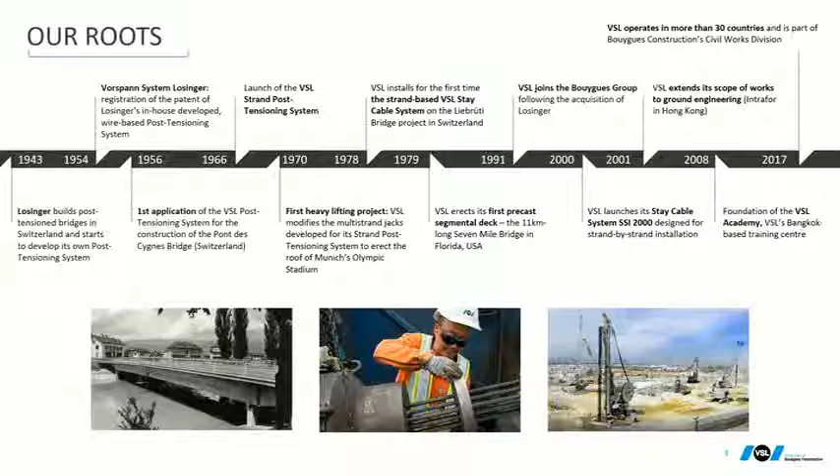A bit of history: VSL was built as a spin-off from Losinger, a Swiss company known worldwide at that time for construction. VSL, meaning Vorspann System Losinger, was created around a patent for how to anchor wires to an anchor head and transfer this force to a piece of concrete. We call this post-tensioning, eventually.

VSL developed the wedge for the 7-wire strand. From this concept, we developed post-tensioning, stay cable, heavy lifting, and other applications making use of strand and anchor heads.

Here's where we can find VSL on Earth. Basically, VSL works on various technologies: bridge construction, foundation, ground engineering, containment structure, repair. In terms of technology, we're talking about post-tensioning as our classical core business, bearings, stay cable - of course the topic of tonight - heavy lifting, and geotechnical.

Bridge construction is something we have been active in here in this region. For foundation, I'll go quickly through all this - please talk to me if you need more detail on any of these aspects.

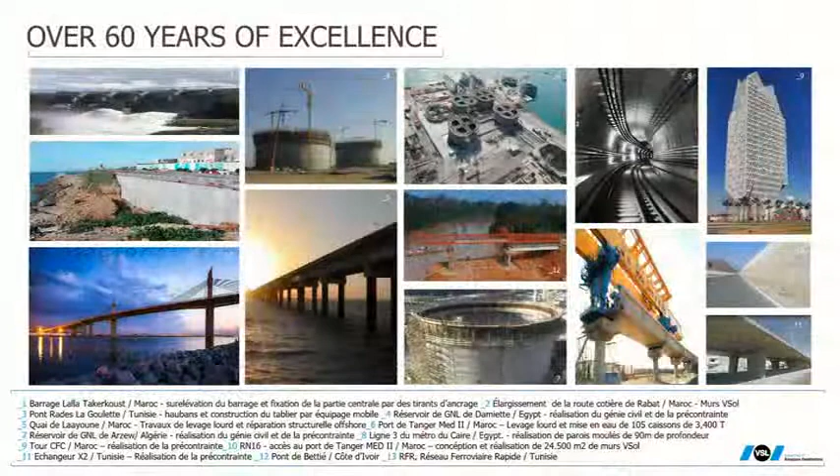So let's now enter the heart of the topic: stay cable. Just a bit more history - the first stay cable bridge was in 1979, and since then we have kept developing, eventually arriving at various solutions up till now.

So here we are. In terms of stay cable, we're going to look at it from the point of view of components to begin with. Everyone knows what a stay cable is - it's a cable structure transferring force from one point to the other. Today, in the perspective of a new recommendation and a new code, it's seen as a family of 5 components.

The first is the tensile element, the strand, which transfers the load from one point to the other. Second is the anchoring, the anchorage, transferring the force from the strand to the structure. Yes, please.

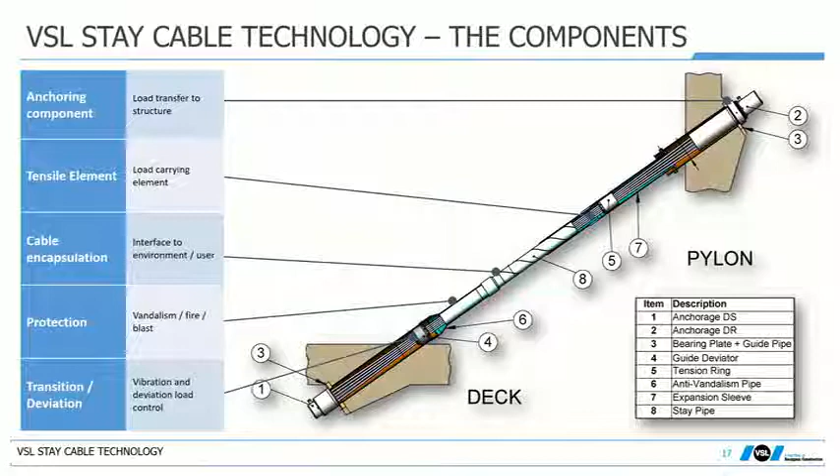So now in terms of application, today, and especially in the perspective of the FIB code, systems have to be modular, meaning that you can have a technology of strand, the technology of anchorage, and apply it to various different applications. And this offers some design opportunities.

Basically, we have a cable with 4 different families of applications. We have stay cable bridges, long span structures, long cables. We have what we call extradosed bridges, where the quantity of live load compared to permanent load is much smaller, permitting some optimization in the behavior of the structure. Then we have hangers, roof cables, vertical. Then, at the other extremity of the application range, we have what we call bowstring cables or tie-downs.

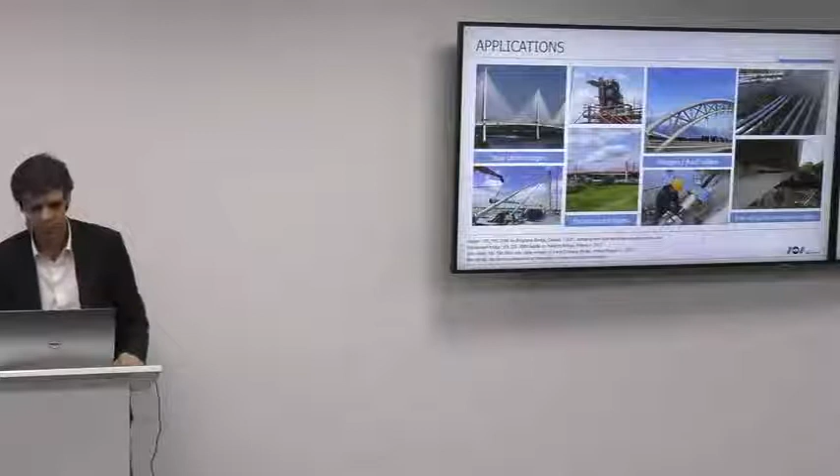And all these different cable applications we can give a bit of classification. I'll just change the slide. This classification is made from the point of view of the loading, whether this loading is a high fatigue loading, or where there is more deviation, or combined. And from this loading, what type of permanent force we accept to have on this cable, or let's say it differently, what part of the capacity of the cable we accept to have as permanent force, and what other part is left to cater for safety.

So if we go with stay cable, we have high fatigue loading, high deviation potential occurring, and therefore we do not occupy more than 50% of the capacity for the permanent load, basically. If we go with extradosed cable, we have moderate fatigue loading, low deviation, and therefore we can go beyond in terms of permanent force.

Hangers, these depend on the application. We can have hangers experiencing no fatigue loading, and others with high fatigue loading, and therefore this is a decision of design: what is the maximum force you can have in permanent situation?

Bowstring cables usually have very low fatigue, almost no fatigue, no deviation. Tie-downs have low fatigue, but can have extremely high deviation.

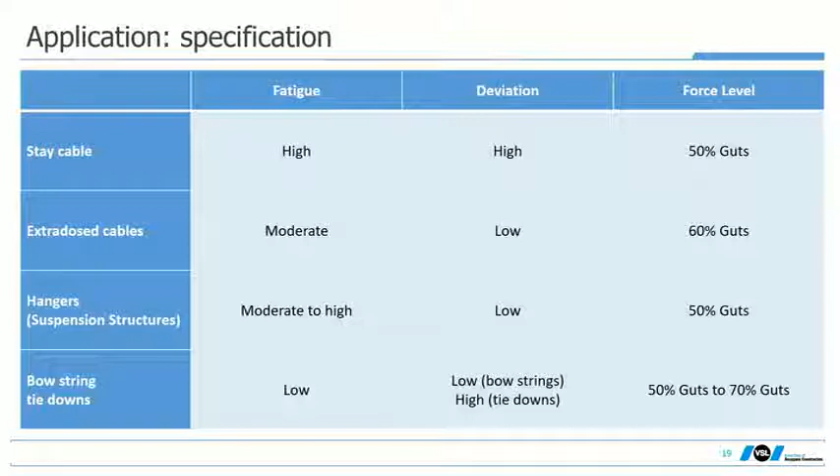Is this the initial load you put on the cable when you construct, or is it the final capacity? You can only stress to 50% when you put it. This value usually is what we call the maximum service state, meaning that if you anticipate a high service load for your permanent situation, you would stress it initially at 30%, for example.

Finishing with tie-downs. Tie-downs are cables used to restrain a deck of a bridge against the abutment. Most bridges elongate with temperature variation, and therefore this cable can experience very big rotations. So as a designer you have to judge what would be the maximum force in this cable in service, given the potential deviation you may have on the tie-downs.

So, from this classification, VSL, as a stay cable supplier company, is offering a portfolio of solutions. And what is important with these various types of solutions for each application is that they can be combined together.

Typically, for the tensile element, we have various technologies of strand. These have to address the situation of the structure, basically the exposure to environment, how harsh it is or not, the type of loading you expect, and very important, the normative frame in the area, the design codes.

Typically, in the USA, it is not allowed to have galvanization on the strand on federal projects, and therefore you have codes developed for the use of this type of strand without zinc. For the rest of the world, you can use zinc, so it makes the technology a bit different.

Why in the US do we have no zinc? Why are Americans not allowing galvanization? I think galvanization is a technology which is extremely polluting. One reason, not the only one, is that the galvanization process is highly polluting. But it's not only this reason. Today, what I know for sure is that they are developing a code, a design, or a normative to have zinc in the US as well.

But for the moment... does heat change the performance of the material? This is true, but it doesn't mean it doesn't work. When you have a material and you apply a zinc process, you change the characteristics. This is true, and therefore we have different requirements for strand with and without zinc. Especially if you have silicon in your steel, you have a bigger impact on the zinc. Yeah, you are going to have brittleness. Exactly.

Talking about the transfer component for transferring the load from the strand to the structure, we can apply various different solutions: solutions with anchor heads, solutions with clevises, and solutions without any anchor, just by deviation. We introduce the load to the structure through a deviation of the cable. We call it a saddle.

The encapsulation of the cable, the stay pipe, has to accommodate the environment, which can be of various forms. It's there to provide the cable a satisfactory behavior in terms of wind impact. The wind impact is of two natures: the drag first, which is the force the wind introduces onto the structure, making it tilt - this is one aspect. The other aspect is dynamic, how the wind is exciting the cable.

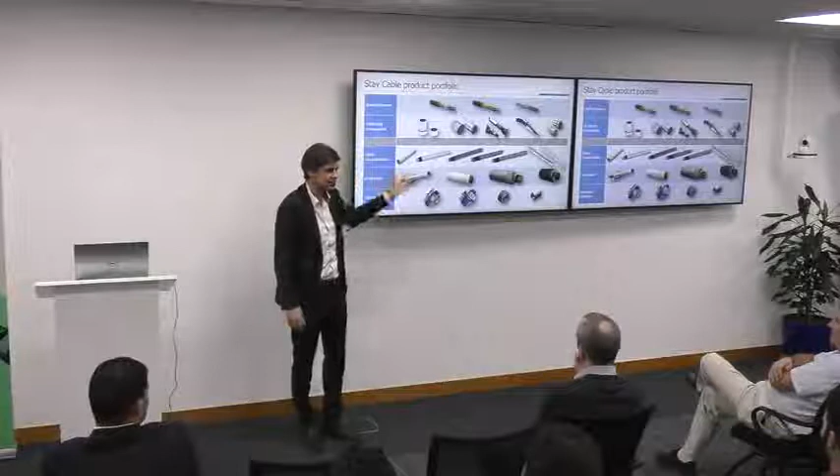Then we have protection, various types of protection - basic protection, fire protection, blast protection - all of these being required or not depending on the structure. And eventually we finish with the deviation device, which can be dampers, which can be guiding devices, or can be just nothing, just a compacting element to maintain this compact shape of a cable.

So we go one by one through all this family. Let's start with the main tensile element and coming back to your questions. Today the standard is this strand, which grade is 1860 MPa. This is a new standard which has evolved from the former 1770.

Today, the strand industry has developed a higher grade, 2160. So the wire industry is increasing the capacity of strand. And today, of course, VSL is proud to have been fully qualified for this application.

Is there any reduction in the extension at failure? You mean strength? I said extension, you mean elastic extension? Yeah, because you have got a certain extension upon which you should not allow any further for the ultimate. So the Young's modulus is the same. Relaxation? No, extension, not relaxation. So if you apply a higher grade of strand, you can reach a higher extension.

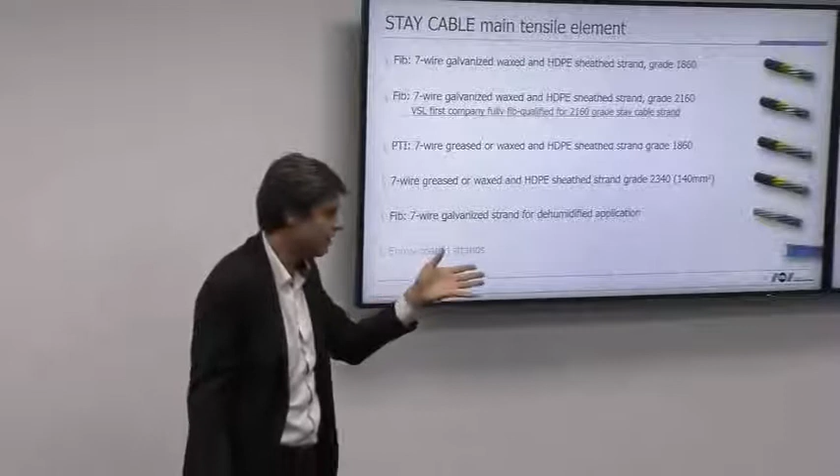But if the next question is, can we optimize the structure by using this strand, the response is technically yes. Economically, not sure. The cost per Newton of force is higher with this technology of strand compared to the classical one. So unless you have a clear technical reason to go more compact, using this high-grade strand might not be optimum.

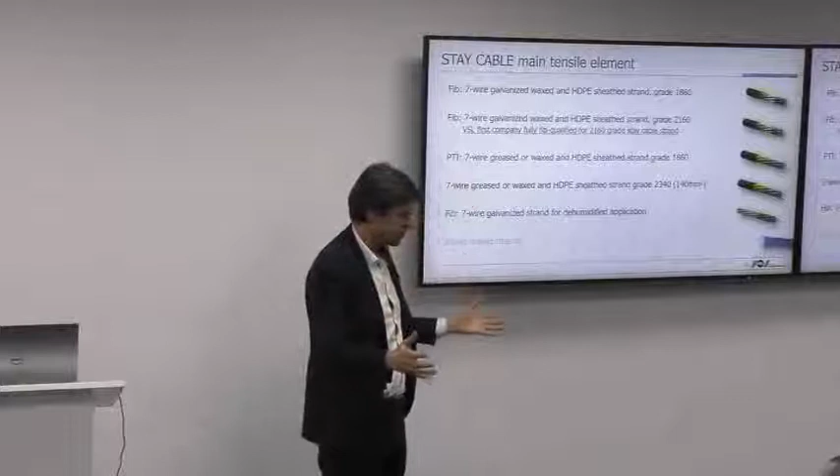How much more expensive? Like 20%, 100%? No, it's not this. We're talking about a few percent. But this depends if you analyze the global cost in a structure, and introduce all other parameters. If for the same quantity of strand you have higher force, you can reduce the number of strands and save on labor costs and in many other places. But trying to save only on the pure kilogram of material is a waste of time.

So this is a strand we call PTI strand, which is the strand as recommended in the US. It has no zinc, and therefore has slightly better behavior for some aspects and slightly lower for others. Talking about fretting, for example, it's a bit less; talking about ductility, it's a bit better, due to the no zinc on the strand.

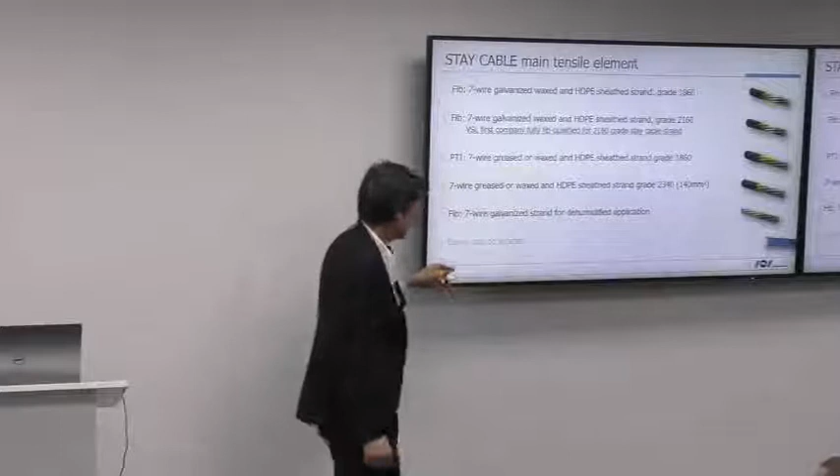VSL is making use, for a specific concept I'll show later, of strand without any sheathing and injection. And eventually, we're talking about epoxy-coated strand. VSL has reference experience with this type of strand, but VSL does not recommend its use.

Do you have epoxy-coated strands for stays as well? We have experience, but we will never recommend this technology of strand. Why do we not recommend this? Does it crack? It cracks, yes, well, it's correct. It's very famous for internal strands, but then you have a lot of wedge loss, etc. You have a huge setting of wedge, and a huge increase in relaxation.

Today we are relying on this strand because it has very low relaxation. Now we introduce a technology which multiplies the relaxation by more than 2. On top of this, in testing, this strand has low redundancy, meaning you do not lose one wire, you lose a complete section. It's a localized corrosion. Exactly.

So you don't recommend it just for stay cables or for post-tension? VSL's position is to do the best for the structure. Today we have not seen any advantage of using epoxy-coated strand in any application. Maybe we have overlooked something, maybe we have missed a point somewhere, but for the moment we do not see a technical interest in going with that strand.

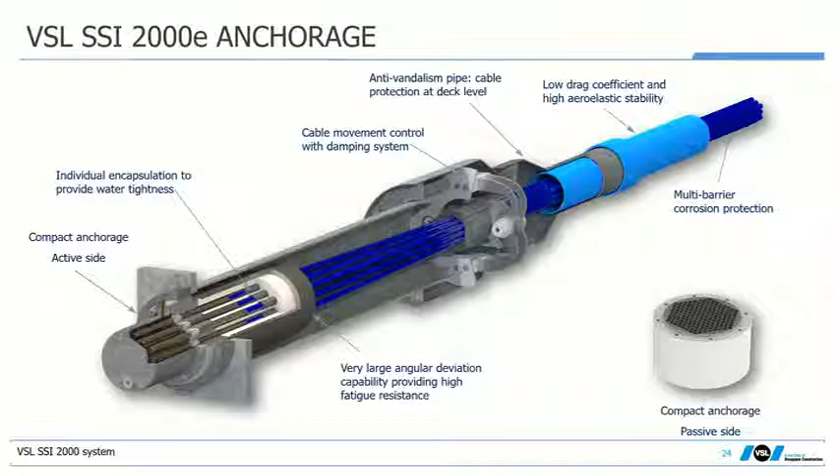Where VSL has been developing lately is introducing all these components here in what we call the transition zone of the anchorage. For the passive anchorage, they are integrated into the anchor head. The anchor head is this piece of steel where you have the wedge transferring the force of each strand to the anchor head.

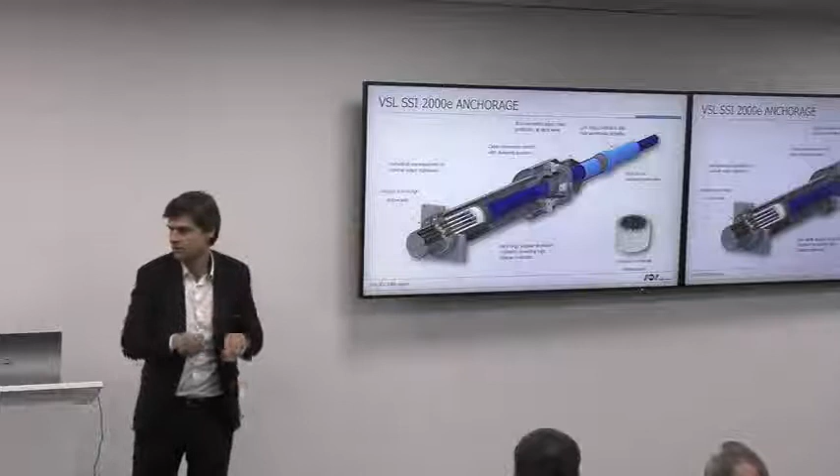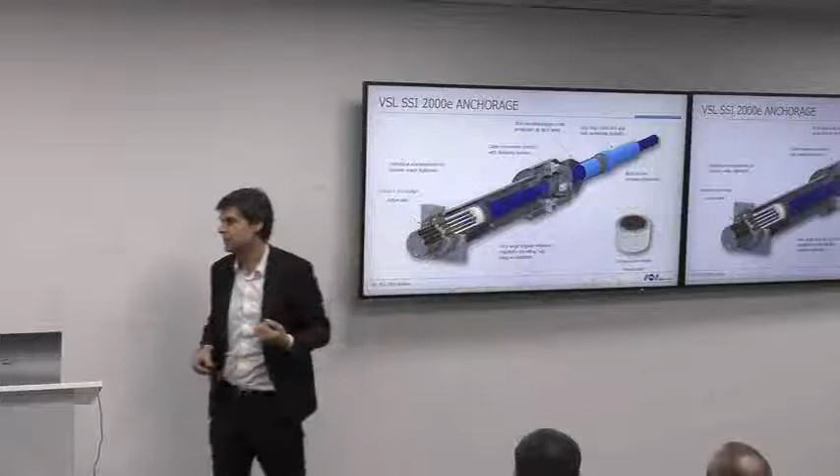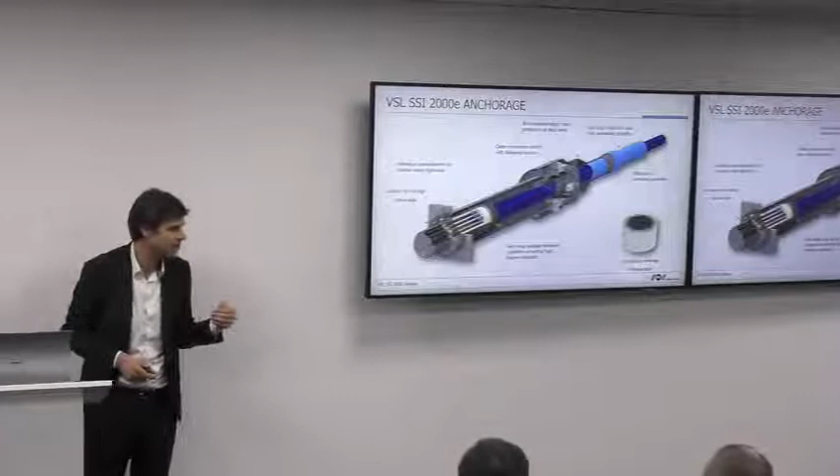So we have all these parts here, which are in this transition zone, introduced and consolidated inside this anchor block. This is kept on the active side for one reason: from this side you have to stress or tune the force of the cable. So there you don't know where the sheathing of the strand stops, and the sheathing has to stop inside the anchor block. So we have an extension required to make sure we absorb this position of the sheathing stopping inside the anchor head, and to make sure the system remains tight during service and during installation.

You have any question on this?

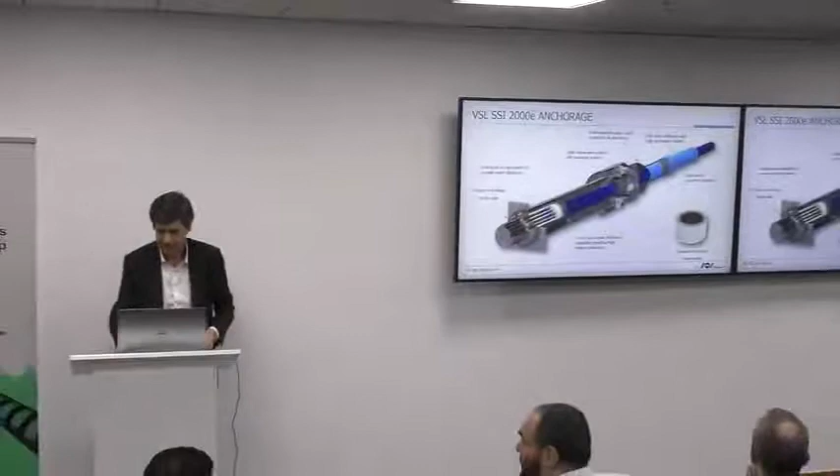So this anchoring system can be implemented into a structure, and there are a lot of different possibilities to do so. At the bottom, for example, it can go inside a box girder, below a box girder, above the deck through a steel structure. It can be attached to a tower through steel structures, or through the tower, or inside the tower. Everything is modular, and it's about design possibilities, how to connect it.

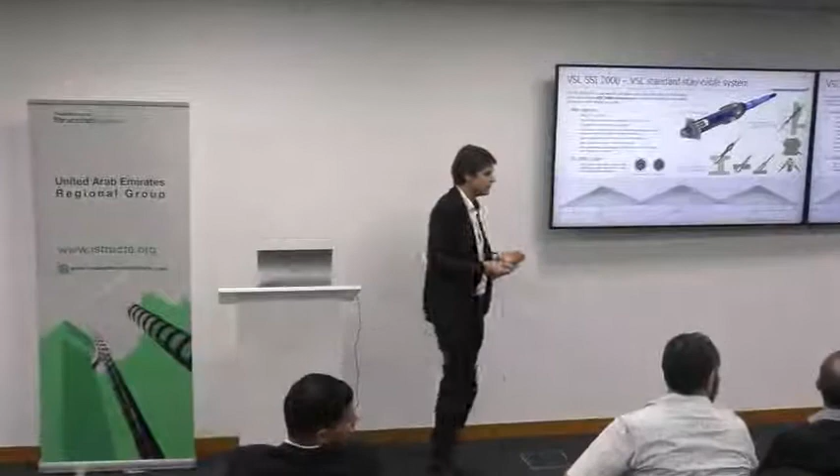What's the minimum space required if it is inside the box girder for your jack? Here, for example, the first trick, here or here, absolutely for the jack. Is it VSL's proprietary jack for the system? Correct. So what is the minimum space? We can tell you it's 1 meter behind the head, for example, but then we can negotiate a bit on this one. For this one we can work with much smaller space on the passive side. On the active side we can as well reduce the space. It's a detailing exercise - we just have to make sure we can do the operation we're supposed to do, and from there we define the minimum requirement space.

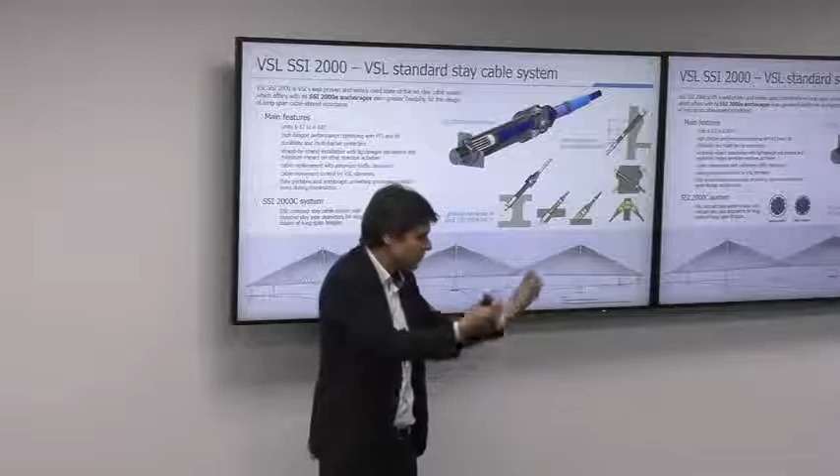It's a good question - are you using single strand jacks? Absolutely, yes. Sequences become really a headache, yes? Not necessarily. How many cables, strands have you got in one cable? We go from 12, or 7 or 3, to 180-something. It's a repetitive exercise, it requires a bit of concentration.

And how long would it take to put the forces in one of those big number anchors? Depending on the stay cable, because you have to thread the strand through, erect the strand, connect the strand. No, just pulling it - jacking. Jacking itself on its own is 30 seconds, but then you have all the process behind, threading the strand through. I was just checking, because you said you've got 170 or 180 strands. Yes, so each strand 30 seconds - but only for stressing. The stressing comes at the end of the installation. I know, but then what's the sequence? You have to install the strand from top to bottom and stress it, then move on to the next strand, making sure they are not entangled in between.

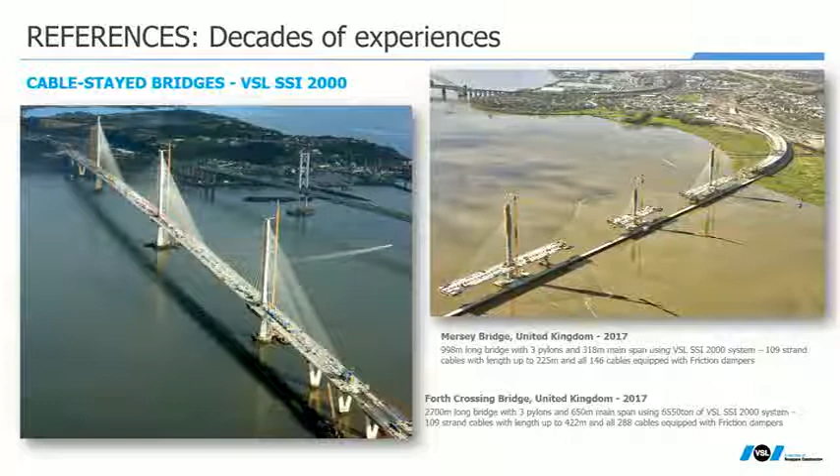So here is an example of application of this type of cable technology. You can see cables ranging from, let's say, 50 meters to 400 meters long. Bear in mind, at 400 meters long, to erect a strand takes a bit of time. So when you have a 100-strand unit, 400 meters long, it takes a bit of time - we're talking about 2 days, 2 and a half days. It depends, but coming back to this system and increasing the force, you just multiply the 30 seconds by the number of strands, and you add it up to something like 15 minutes, 30 minutes, 1 hour, 2 hours.

Just a question - you eventually have to give the bridge to somebody. Yes. Is it going to be a level submission or force submission? You're checking the forces, that the bridge should be at a certain level, at a certain time, certain temperature? Correct. This is, let's call it, a discussion with the designer on what is relevant as a parameter. What is very important is that a stay cable is like a structural element. As a designer, we cannot ask a stay cable to be at the same time at that force and that elongation, because they depend on each other based on how the structure behaves.

Either you call for the force - you want that exact force, and consequently you get the elongation as a result of how the structure has behaved. No, I was talking about the deck - the deck should be horizontal at a certain time. Exactly, the deck should be at a given position, let's call it the road design line. But if you ask for a force based on your model as a designer, and this force is such that after stressing the deck is a bit above or below, it's not the consequence of the cable itself, it's the whole structure behaving.

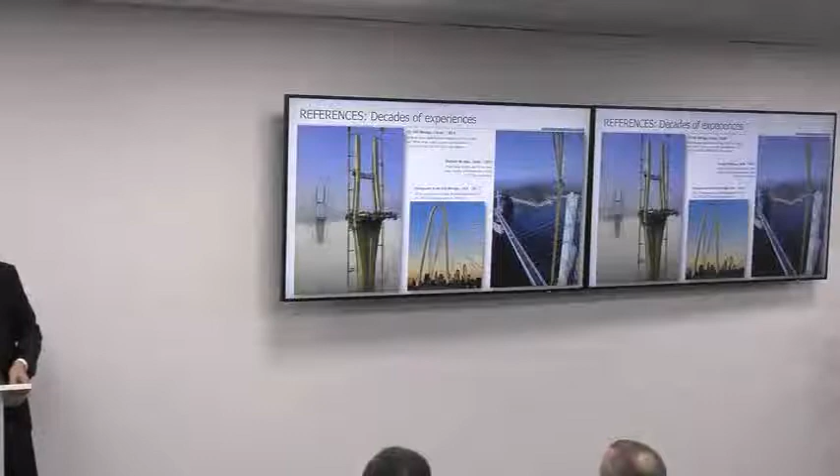We are okay on that part of it. So I just make a...

This is a development that VSL started like 15 or 20 years ago. We call it the dehumidified system. We depart completely from the requirement we have today, or the recommendation, which calls for having strand with wax injection, sheathing, a lot of petrol-based material inside. And we replace this passive corrosion protection with an active corrosion protection.

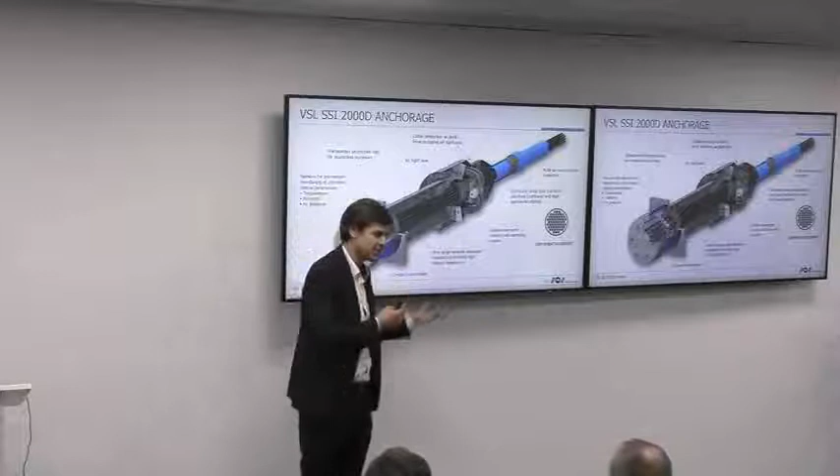How it works is the stay cable system, or the steel main tensile element, including the anchor head, are in a fully tight encapsulation, and the air inside this encapsulation is dehumidified. The water is removed from that air.

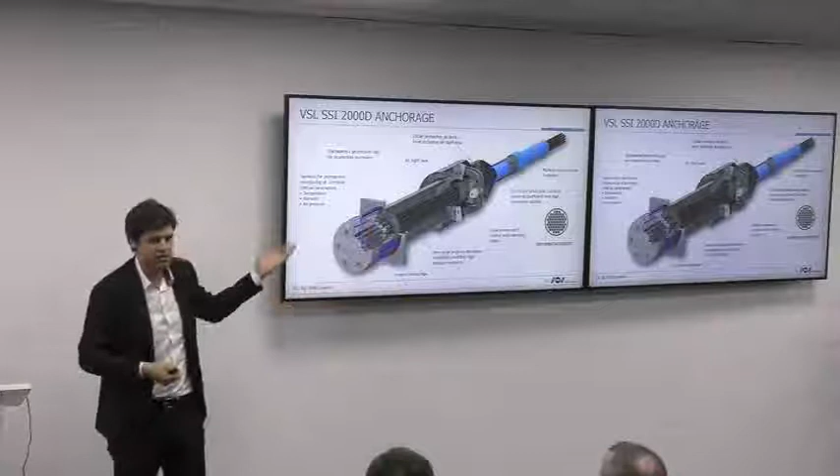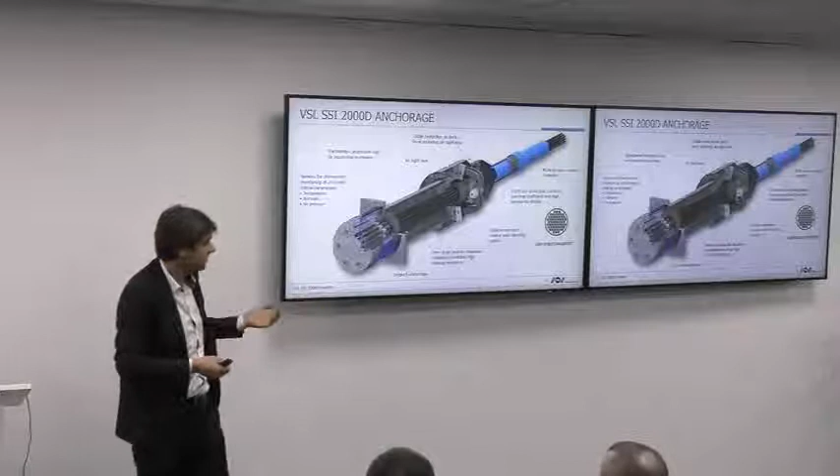This technology is today well spread for protecting corrosion in deck structures, for example, or box girders in steel, and it works extremely efficiently for cables. Today we have catenary cables of suspension bridges making use of this same type of technology for corrosion protection. VSL has piloted this solution, and today we're trying this quite disruptive solution, which is far from recommendation, in a project in Hong Kong. Why Hong Kong? Because it's very humid and hot, so very aggressive for corrosion, and therefore we have the best field situation for testing the technology.

The advantage of this technology is that because we have removed all this material, we can make the stay cable much more compact, and we can combine this together with an existing dehumidification plant working for the deck, for example, a box girder.

So is it a continuous process, dehumidification, or is it done at some intervals periodically?

If you see this graphic here, this is basically the corrosion rates according to humidity. What you find out is with a relative humidity of 60% and below, you have almost no corrosion. It picks up quickly very fast afterwards, but below 60%, no corrosion happens. All dehumidification plants usually work at 40%.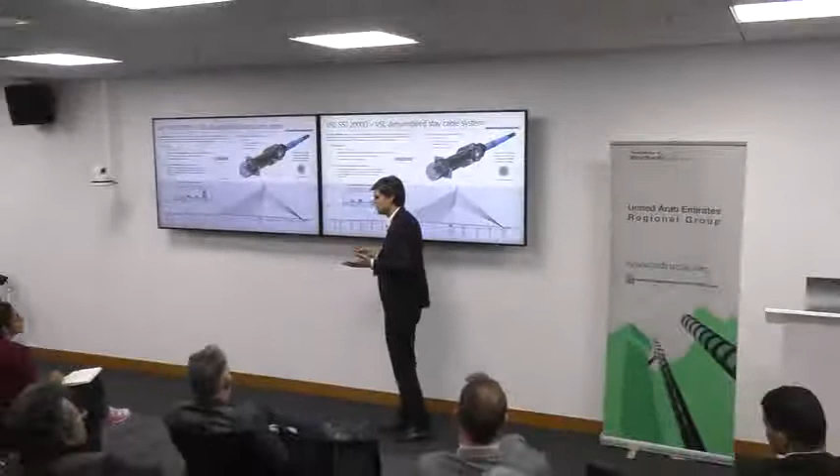So the idea basically is to have a closed loop of dehumidification. This is the principle applied in this Hong Kong project, for example. You keep retreating the same air, and your machine is just here to compensate for leakage. As soon as you have leakage, you have to refeed with dry air, so you dry only the piece of air you add on top in the circuit. At the end of the day, if your system is perfectly tight, the machine works for the first 2 weeks and then it's finished.

If your system has leakage, you keep working a little bit. But we are very far away in terms of electrical consumption from the manufacturing process of the strand itself with the sheeting and the wax and so on. So there you have a global optimization, especially in terms of energy. And today it's quite fashionable to talk about energy saving.

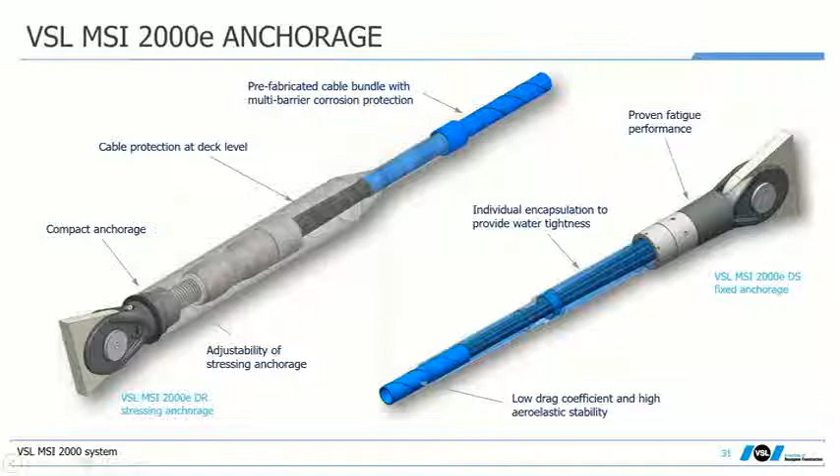So if we move on to other stay cable technology, clevises, I think there is a project in Dubai making use of this type of solution, where VSL has been developing a Clevis stay cable system which has similar performance to a heavy-duty stay cable system, without reducing the capability of the system by having a Clevis.

The system is for light-duty application. We're talking about a small number of strands, so let's say light stay cable, but in terms of fatigue loading, the objective is to reach the same capacity of the conventional system with this classical 2 million cycle test, 200 megapascals variation, and so on, and dynamic deviation of the cable.

Coming with stressing equipment and, of course, application, mostly on arches. This is where we have most reference for this type of technology, or roof cable, for example.

The important thing is since we are using exactly the same technology of termination with wedge and 7-wire strand sheeted, you can make multiple of it. You can apply, for example, a Clevis together with an anchor head. You can interchange components. It's modular.

You can, for example, if I come back here, attach on top a Clevis, and at the bottom having a stressing head like this. Roof application.

Now we talk about saddle. Saddle system has been an extremely successful development of VSL. Saddle is the original historical way of connecting a cable to a tower. I'm talking about 100 years ago. And this has disappeared because of all the drawbacks of this technology.

When we deviate a cable with force and the cable is looking at fatigue loading, you have extremely rapid damage of the cable in the saddle. And so this has disappeared from many recommendations and codes, talking about Germany, for example, or in the US, where in Germany, saddle has been completely banned for a period of time.

It comes back to the picture thanks to this type of development where companies like VSL have achieved to develop a saddle which does not compromise the fatigue performance, and which is giving some solution for the classical problems of this technology.

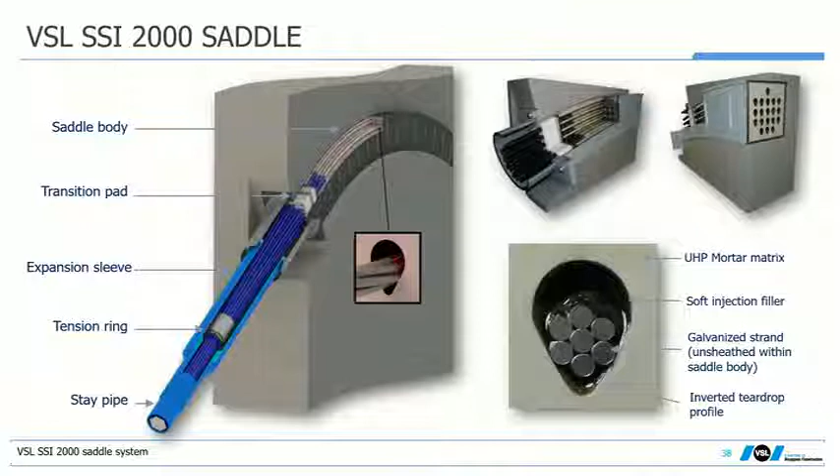How does this work? First of all, it works by having an injection inside the cavity. And second, and this is the beauty of the system, we have experience with wedges. Let's apply this wedge concept all along the saddle.

So the strand, instead of sitting in front of a round or cavity with only one unique point of reaction, it sits on the cavity which has a shape which is providing 2 points of reaction. And we amplify artificially like this the friction, and hopefully we do it without jeopardizing the interface and without creating fretting corrosion.

And of course, we have a main application of saddles in extradosed bridges, and it has been quite successful in Europe.

Just one reference I'd like to mention about saddles. This is one application in San Francisco seismic area, and there are designers crazy enough, interested enough to apply saddles in a seismic area, a friction saddle, and how they did it is thanks to this injection of material inside the hole. This material here has a viscosity. So the combination of dry friction plus viscosity permitted to have a nice control of movement during a service type of earthquake in San Francisco.

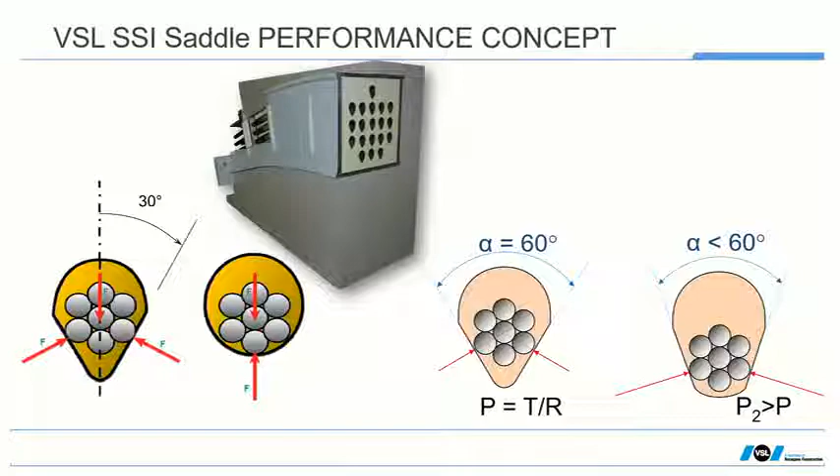But it's a very good point to say, because after installation, due to the fact that having installed first the top one and then the one on the bottom, we have to come back and readjust the force on all the strands to absorb some setting of the matrix itself. So it's possible, it holds the force, but you have to reabsorb by restressing a bit the top one at the very end to absorb the relaxation that has occurred inside the saddle.

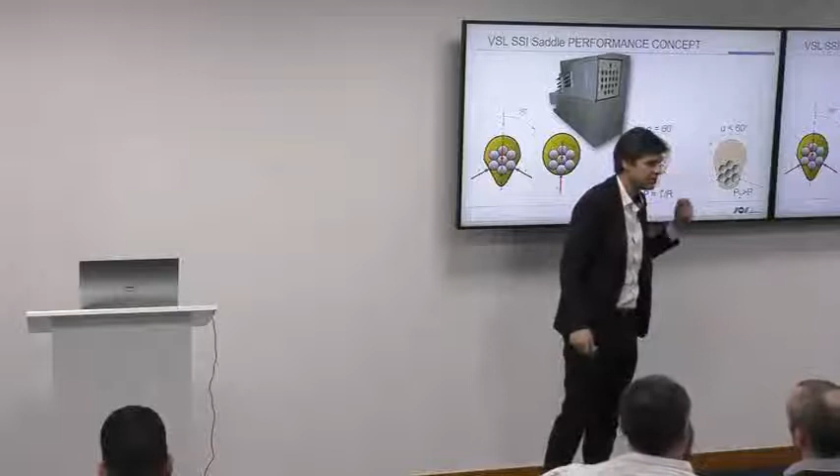Do you use the same technology for external post-tension in continuous structures? No, not that one. We have a different type of technology for this. Thank you. Any other question?

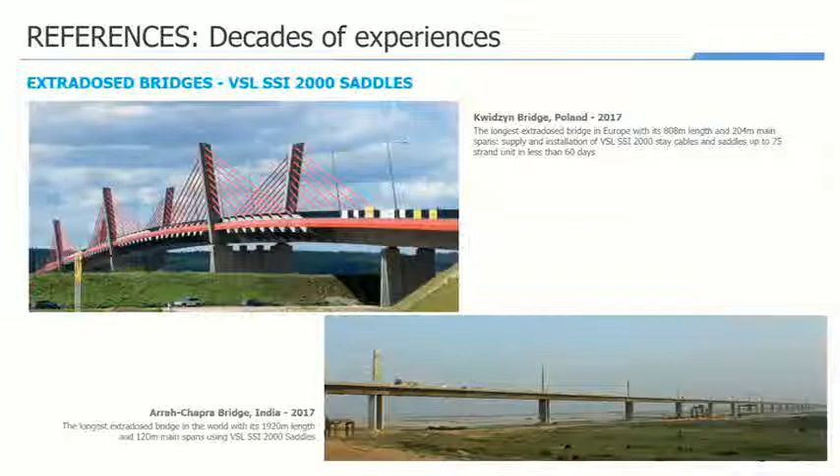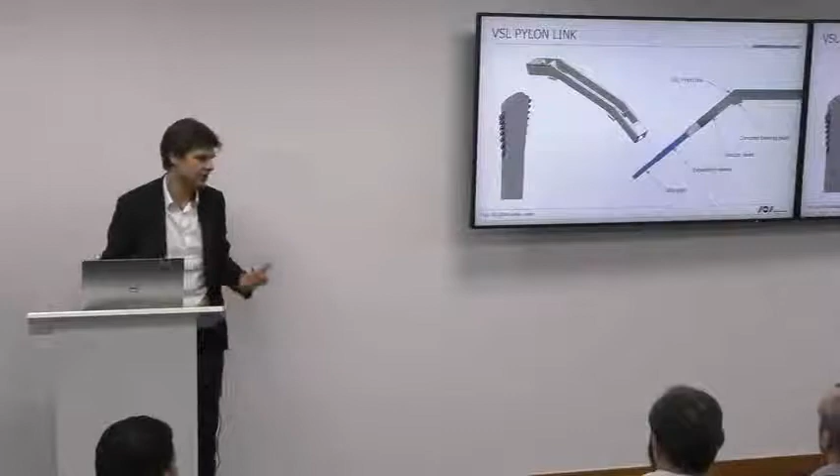A few slides about links. This is an alternative to saddle, where instead of having a continuous cable from one side to the other through a tower, we connect it through a steel structure in the tower. It's a design telling you the size to have a correct behavior between the steel member and the concrete tower. It requires a bit of touchy detail there, but this is an alternative which can work.

Some aspects have to be looked at in terms of durability, and especially at the exit part of this link.

Talking about link, it's an element which is designed to code and not tested, basically. But then we have to consider the right loading on this link, and of course, if you want to have redundancy in your design, this element, and this is mentioned for example in Eurocode 3-1-11, has to be designed to support the breaking load of the cable, and not necessarily the actual load on the cable. Why? Because if you want to have enough room for ductility, the failure has to happen on the cable and never on this element, which has a very small reserve of ductility due to its size.

So these are projects where Link has been installed. Some references, mainly in India and some in Europe.

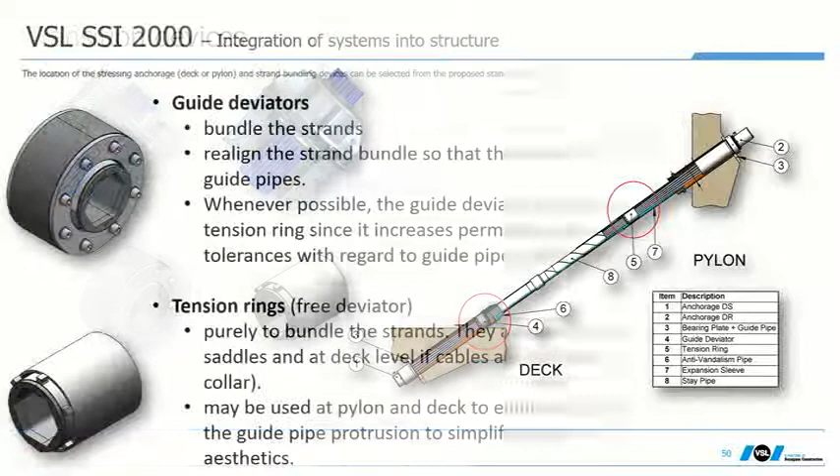Words about transition devices, dampers or guides. Guide deviators are usually required to control that your stay cable, with the deformation you're going to have during service, will not touch the structure, basically. In terms of deviation control, it's not a necessary component for VSL anchorage, but it's very important in case your deviation can go quite far due to whatever effect, service effect, to protect against any contact from the cable to the structure.

Talking about vibration. These are types of vibration which are meant to be addressed by use of dampers. We call it wind vibration.

So this is an example, this is what we call the Meiko-Nishi. The first time we experienced rain-wind vibration was back in the 1980s. Not every cable technology is subjected to this type of vibration. The reason for this high amplitude vibration is because this technology of cable, which is a PWS, has a very, very small intrinsic damping. So any energy introduced by the wind to the cable is kept there inside.

While the strand technology of cable, we have independent strands. Each strand can have an independent movement, creating internal shocks, internal friction, and this dissipates energy, and therefore they are not subject to this type of vibration. But still, for long cables, solutions are required.

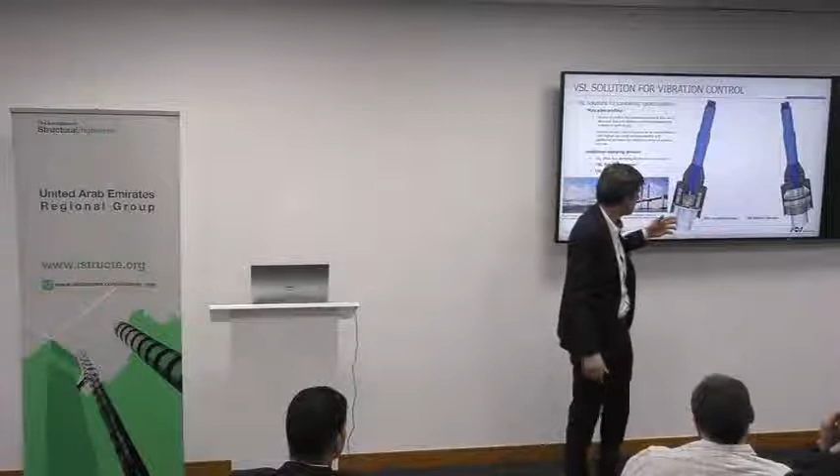And solutions are basically either internal dampers or external dampers. VSL is promoting the use of friction or rubber dampers. They have the disadvantage of being nonlinear, so difficult to calculate in terms of performance. Friction is nonlinear and rubber as well.

However, these dampers have very good performance, a great performance. There is a technical reason behind it: they introduce perturbation into the modal behavior, and therefore you disseminate the energy in one mode into several modes, which can be directly damped by the cable itself in the form of intrinsic damping. And this makes this damper extremely efficient.

And they are compact, and a very important point is that a damper dissipates energy, meaning it transfers mechanical energy into heat in one component, and this component wears with time. And no chance, a damper contains wearing components that have to be maintained. The idea of these dampers is to have this component as small as possible and as easy to change as possible, basically.

Does that affect the design life? Or do they have the same design life? A damper is meant to control vibration.

The vibration is affecting the design life of a cable. Why? Because it damages components here for corrosion protection—I'm talking about the sheathing, the seals, all the specific components that are very sensitive to vibration. So by making use of dampers, you increase the design life of your stay cable. This is one solution to manage the design life of a stay cable. Doesn't it affect the fatigue life?

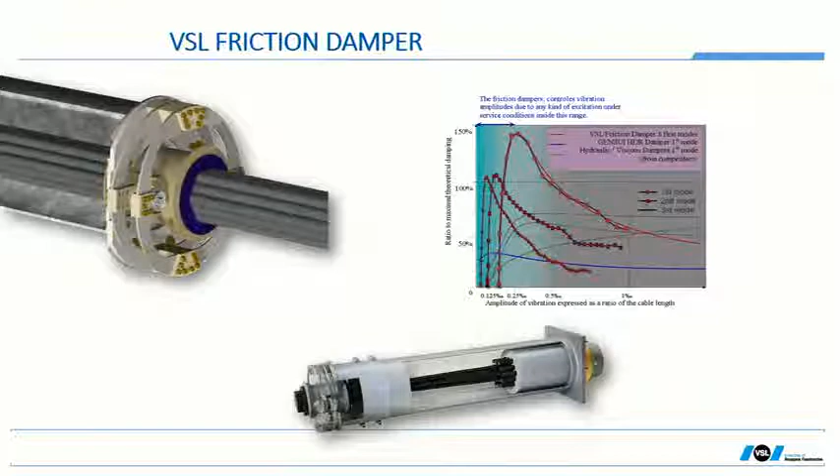So bridge deck dampers can be installed for different purposes. Shock absorber, you mean? Yes, correct. Here we're talking about dampers for the cable. Typically, like this, you can see it here - you have the cable, and the cable is moving. The damper is at the interface between the fixed part of the deck and the cable itself, and it dissipates this relative movement energy through dissipation. It's a different technology compared to the deck damper.

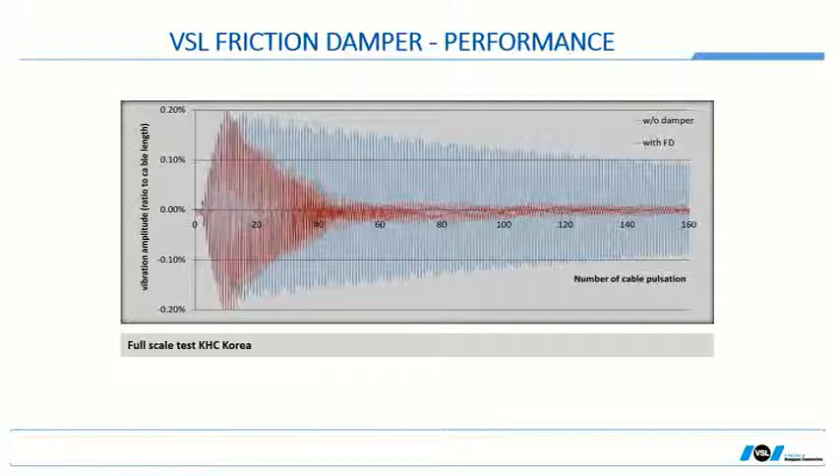Basically, how you assess the performance of the damper on the cable is by doing a test, and you measure the logarithmic decrement of the cable. This is how the damper is reducing the vibration per cycle - you measure how much two consecutive cycles differ in terms of amplitude, and from there you derive the performance of the damper. So there is a bit of analysis behind it to anticipate the performance.

And this type of analysis, of course, VSL as a damper supplier can support you as designers to define this. It depends on the frequency of the cable itself. Yes, absolutely, it depends on the frequency.

Here is typically, just to show you, for the same stay cable various technologies of dampers tested, across various modes for example. As you can see, the frequency can depend upon the mode, and every technology of damper doesn't behave the same way with frequency. Some dampers will provide performance independent from the frequency, and some others independent from the amplitude. This depends on the type of function or behavior your dissipative component has. But we can have a deeper discussion on this if you wish.

Because usually for other structures we use a tuned mass damper - a certain mass is connected to the structure through a spring, which absorbs the kinetic energy. Correct. This tuned mass damper has been tried for stay cables, but the big difference is that a stay cable can be sensitive to many different modes of vibration, and the tuned mass damper you tune for a specific frequency, so you lose performance for the other modes. So what's very important for a stay cable is to have a damper which can work with similar efficiency for various different modes of vibration.

I've seen them being tied together - if these cables are going that way, they're tying it that way. Is that efficient as well? Cross ties, you mean? Yes. Yes, cross ties are extremely efficient for damping vibration.

But this raises the question of the durability of this stay pipe. If it's part of the corrosion protection concept, the performance of the stay pipe has to be assessed in terms of durability. This component is plastic, HDPE. We know plastics degrade with UV and light, so there are tests to be performed to qualify this.

Keep in mind that many colors are available, and not all these colors survive the same type of solar exposure. We have much higher, better performance for white, gray, black compared to red. A red stay pipe in Dubai will not stay red for a long time.

This has to be kept in mind by designers to make sure the right color is chosen. A stay pipe's primary function is to protect the stay cable, and secondly, to give the stay cable satisfactory dynamic behavior according to wind.

What it means is having a lower drag coefficient and making the stay cable insensitive to galloping or vibration phenomena. This has to be assessed through wind tunnel testing, which occurs regularly to assess this performance. Today we are making use of rib technology to achieve this, but there are various technologies of ribs.

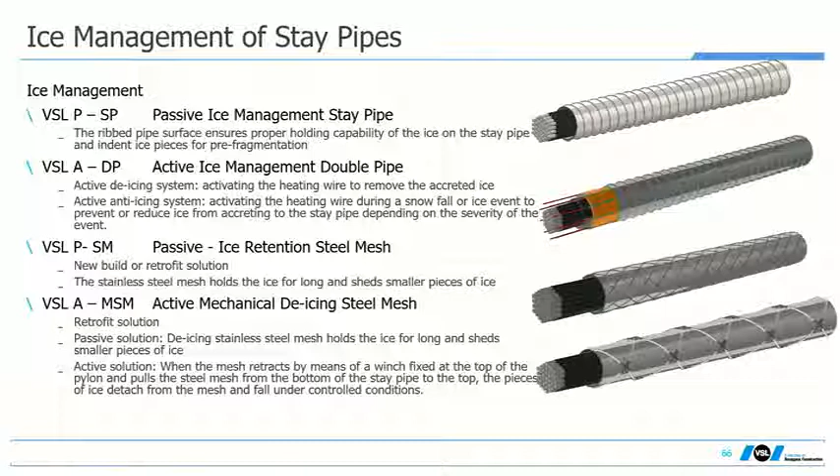We are very proud to have achieved lab testing on one solution which has been proven in the lab to be working extremely well. We can go into detail on this one day.

LEDs - this concept picked up here in Dubai a long time ago for a project which is not yet here. From the engineering point of view, it's a very nice challenge. Aesthetically, it's questionable - I think that's a matter for architects. But in terms of design...

it's a fantastic challenge. Introducing a light onto a stay pipe and expecting this light to be in the same position after 5 years and shooting in the same direction, because this is part of the architectural design, is a challenge. We are very happy to have taken this challenge and found a solution for it, addressing the installation, the replacement of the LED, and of course ensuring LED positioning all along the lifespan of the stay cable.

So we have had the first mock-up here in Dubai for a couple of times.

A few words about cable protection - we're talking about protecting these areas here where users can access.

Defining a protection for the stay cable goes through a risk assessment. It depends on the design first, whether this design has enough redundancy to accept damage on the stay cable, and upon some risk related to the use of the structure.

To help designers or owners make this risk assessment, we have developed this different protection level rating, where P0 basically is when you have no protection, only for environmental impacts - rain, wind, dust and so on. P1 is what you're going to find on most bridges - protection against unintentional effects of a user on the cable, anti-vandalism, and environmental impact.

P2 is typically for a bridge which is missing a bit in terms of design redundancy, so we have to make sure an accident happening there will not jeopardize the bridge itself, or for a structure which is a bit strategic in the sense that it cannot afford to be closed for a period of time for replacement or repair.

And P3 is for strategic infrastructure located in a geopolitically unstable area, like the US, for example.

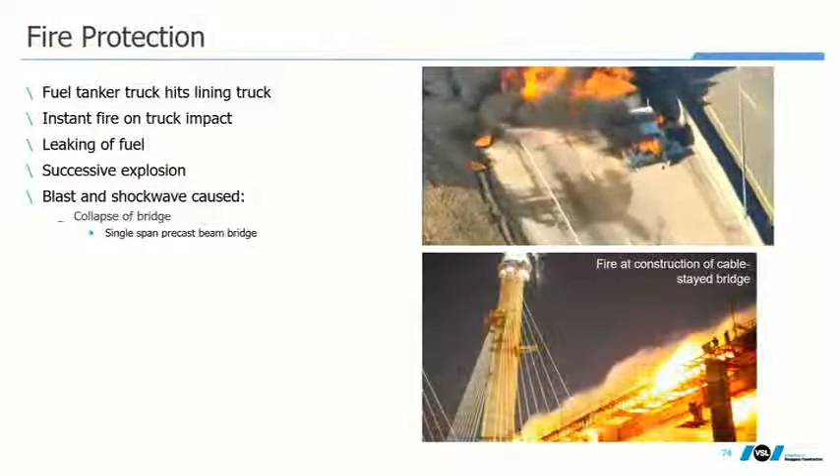Talking about fire protection, this type of event can happen. We have many examples of events where a truck can catch fire. We're talking about a hydrocarbon fire, 1,100 degrees. The duration of the fire depends upon the situation of the structure, whether it's far away or close to a firefighter facility and so on.

And from there, we develop fire protection. These fire protections are here to provide the cable itself, the main tensile element, a sufficiently low temperature so that it can hold the force. And this is assessed by tests.

Tests today are mandatory according to PTI. They are coming onto the picture in FIB as well. There are various types of rating of fire protection, mostly depending on the duration of fire. The temperature of fire itself is 1,100 degrees basically.

One of the load cases, the design of a cable-stayed bridge, is for the case that one stay is not there, isn't it? Correct, so we call it redundancy - the bridge should stand even if it loses one cable. Yes, correct. Today, at least if we follow Eurocode as a design document, we should have redundancy of one cable.

Yes, and some codes require even more, some less. But then, from there, we take a decision on whether the design has already accommodated for a fire risk or not, and if not, we can reduce the consequence of that risk by having protection. It's a risk assessment approach, which involves design and the component itself.

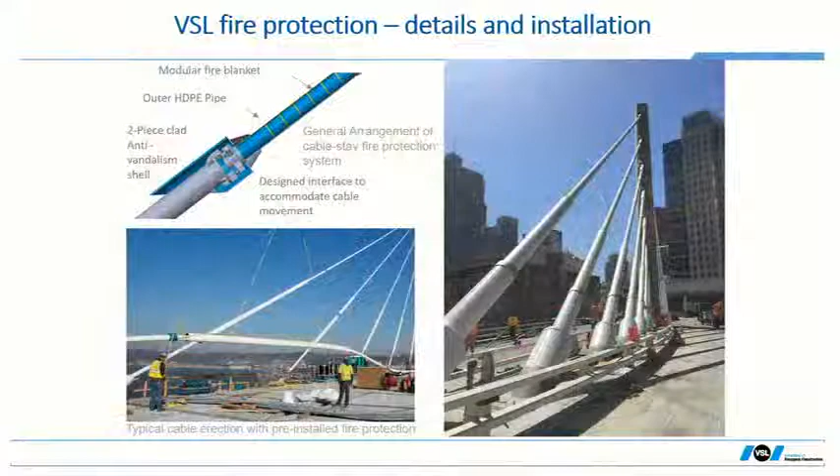So this is an example of a bridge making use of fire protection and blast protection. One slide about blast protection. Ultimately,

VSL is developing one solution, capitalizing on the fact that as part of design, a stay cable is under permanent situation, stressed to 50% of GUTS, meaning 50% of the cable capacity is redundant, is there just for safety. The idea of this concept is to make use of this additional 50% of strands to protect the core one inside in case of blast.

And how do we do this? By having an individual protection for each strand, and the outer strands deflect whatever blast load, providing protection for the core one inside, making the blast protection extremely compact and a bit lighter.

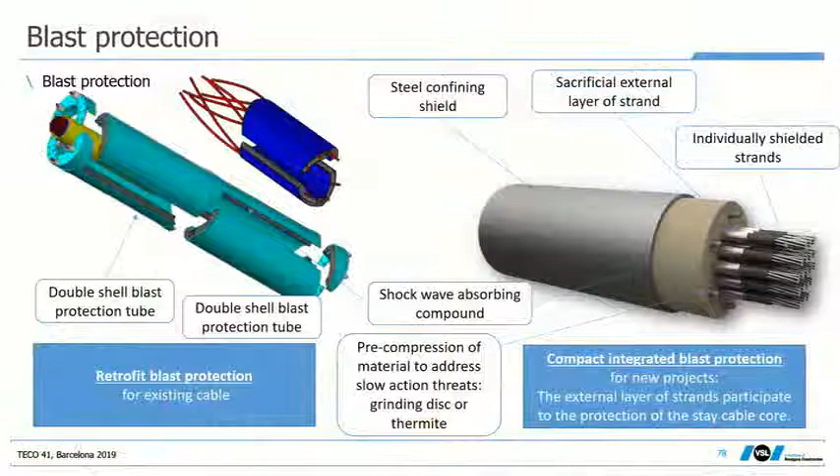So now we have been through almost all these components. If you have any questions, don't hesitate.

Shall I go on to stay cable development? R&D - I had feedback earlier today about stay cable technology having evolved extremely quickly lately. Stay cable is still a domain of steel engineering where there is a lot of development today.

And the R&D can be made either in-house, as VSL is doing, as well as with universities in partnership with a designer as well. And the latest developments are this LED and ICE issue.

We have not been talking about this. Installing stay cable, as mentioned, is technical work and requires a bit of training. Today, this training is not systematically given in universities. It's the role of each specialist contractor to train their staff in installing stay cable. The performance of a stay cable, and this is quite important, does not only depend upon the quality of its components - it depends as well on how on-site this component has been assembled and installed.

And VSL has developed an academy where there is a mock-up where these installation methods, tools, and equipment can be commissioned, where staff can be trained before going to a site where they have to perform for the very first time.

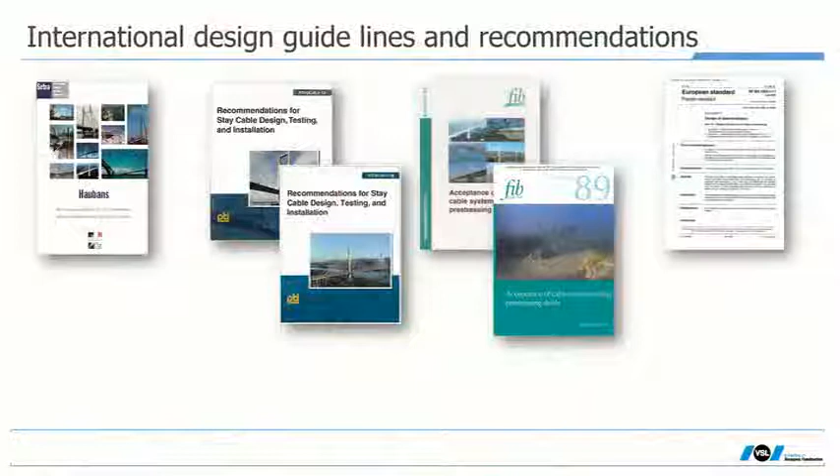So what type of test are we talking about? We're talking about a fatigue test, where we are aiming to confirm the actual fatigue performance and the bending fatigue performance. This is a newcomer into the FIB 89, and this is to address ULS design situations.

For SLS situations, we have a test to qualify the serviceability of the system, which is a leak tightness test. We make sure that the system is offering a suitable service performance, and for saddle friction test.

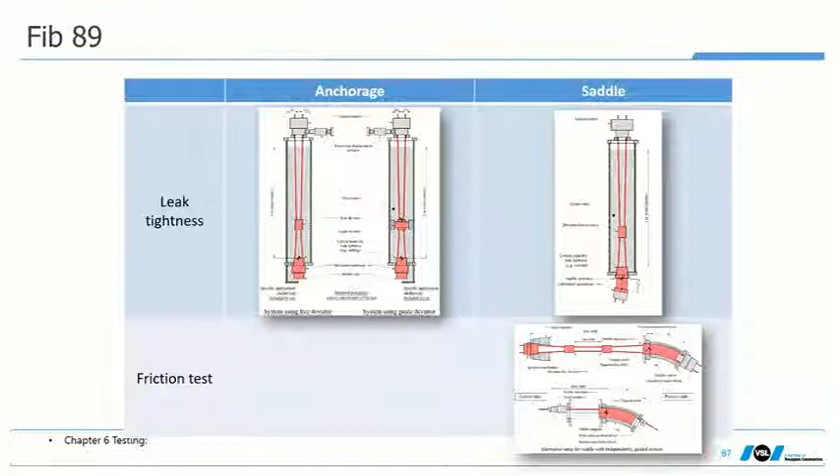But it's not everything. We have as well qualification of stay pipe or encapsulation, which go through wind tunnel testing of two types: drag coefficient and dynamic behavior.

And basically, we have as well, on top of this, tests for the deviation device, dampers. These tests are mainly done on field, and they are here to prove our assumptions on damper requirement and design.

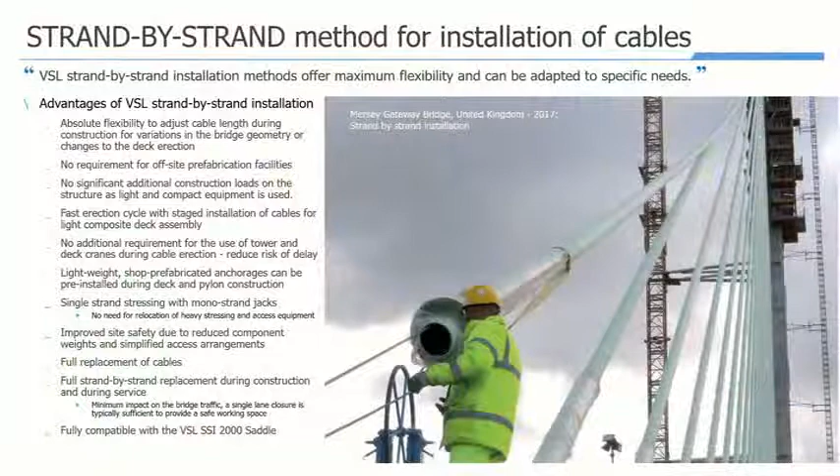A few words about installation, quickly. Stay cable, the way they are developed and promoted in this company, is strand-by-strand systems, which are stressed strand by strand. Basically, it consists of erecting first a stay pipe with one strand inside, and from this stay pipe in place, threading one by one each other strand, and stressing them using an equipment. Hopefully this equipment is a bit modern, having automatic record of information and so on, for a smoother relationship with the designer in terms of exchange of information.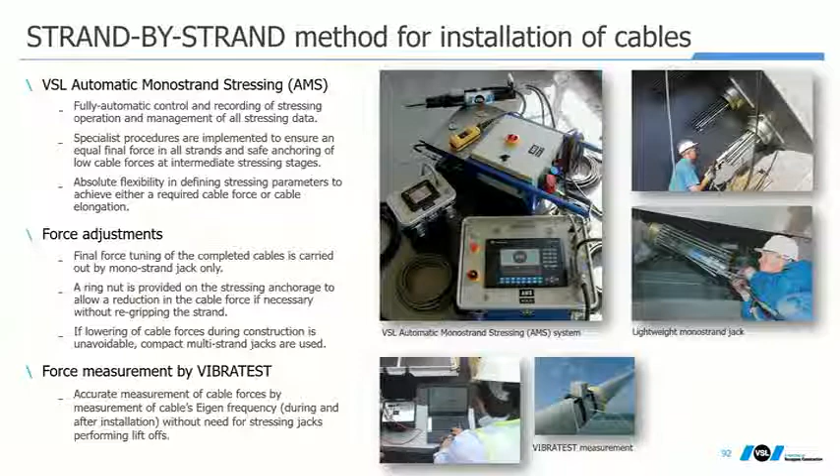Was there anything to do with rain as well? You're talking about the stay pipe? Yes, correct. These ribs are here to cater for a phenomena of vibration - we call it rain and wind.

But not only, and especially lately, based upon the last PhDs performed in France on the CSTB, they found out that the biggest positive impact of the rib is for the dry galloping. The theory of rain and wind can be questioned again, whether we're talking about surface texture or whether we're talking really about a rain rivulet. This can be summarized into dynamic behavior, so this is why I call it dynamic behavior with the wind, or wind interaction, dynamic interaction with the wind.

Yes, it's a good point.

So here, installation of stay cable with saddles. With saddles, two cables are installed simultaneously, the one on the left and the one on the right, because the strand itself, the main tension element, is going through the tower. It's one piece of strand, anchored one anchorage to the other, going through the tower.

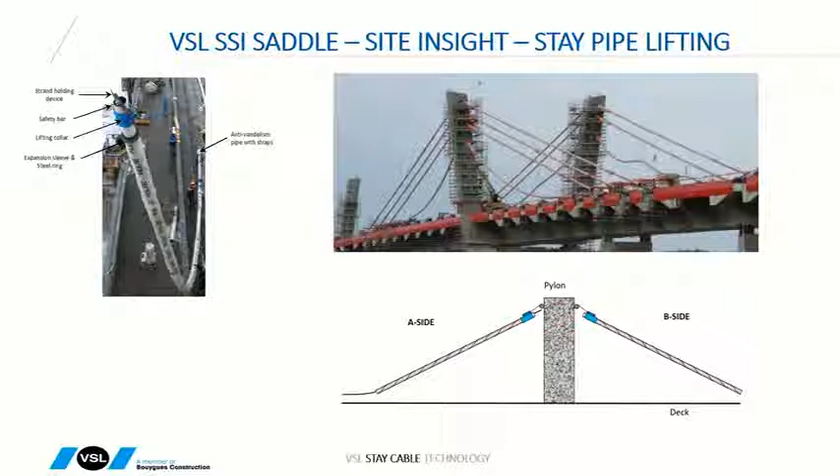Last but not least, monitoring, maintenance, repair - what happens during the service life of a stay cable and a stay cable bridge. Monitoring is quite fashionable; we have to manage the service life of a structure. A stay cable is a very good probe to understand the behavior of a stay cable bridge. Knowing the force of a stay cable gives you a lot of information on the bridge itself. And these structures are highly exposed to environment, and therefore they require a bit of monitoring.

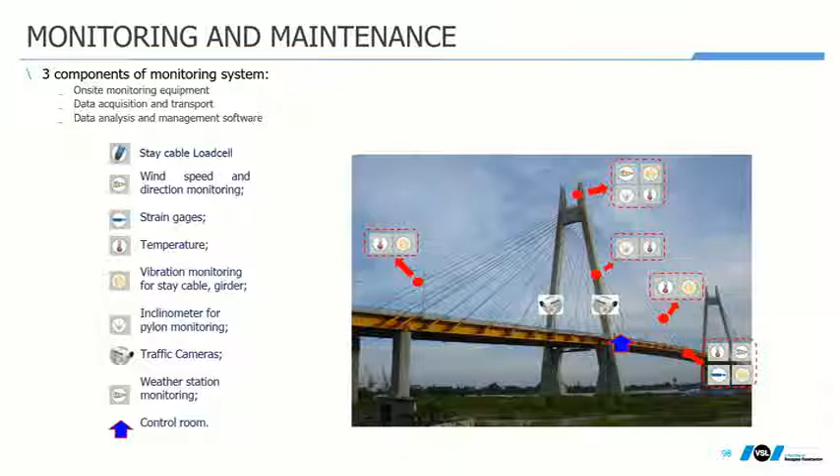So we're talking about on-site measurements, data manipulation, treatment, and interpretation analysis. So all this process has to be implemented.

Maintenance of stay cable system. Today, one information about new technology, especially this one from VSL, is that they are designed to be maintenance-free. This is opposite to a locked coil system, which requires, by design, a regular maintenance. This type of cable requires no maintenance for 100 years, let's say.

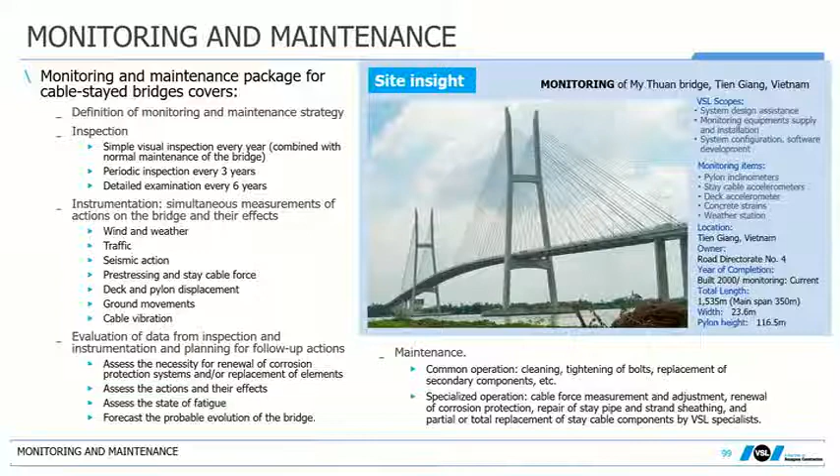However, this design is based upon information we have today. A big part of what happens on stay cable is unpredictable, and therefore inspection is a must. Another way of saying things is that a maintenance program is established for stay cable based upon findings from inspection. From these findings you understand what would be the particular lifespan of particular components, and therefore you can tune your design plan. So when approaching a project with stay cable system, according to this state-of-the-art technology, we have to bear in mind that the final maintenance plan is developed along the service life of the cable itself, based upon findings from inspections.

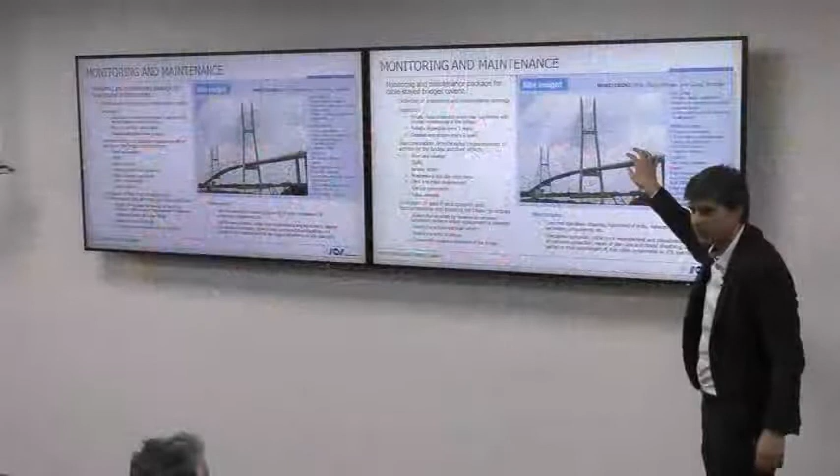How can the top portion of the cable be visually inspected at this higher level? On this bridge, for example, we have an access, about the periodic inspection. You have two locations in your stay cable where you can have defects, where you can tune and understand how it behaves with age. It's near the anchorage, either here or here on top. So you have an easy access here in this anchorage. This is reachable. What about the top?

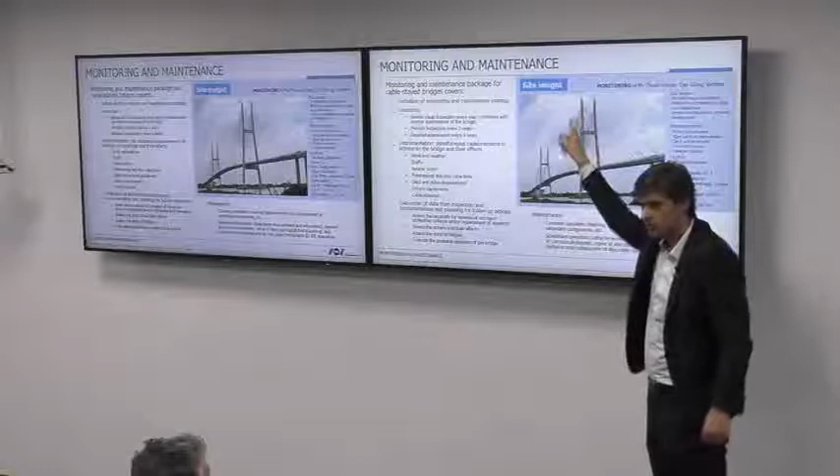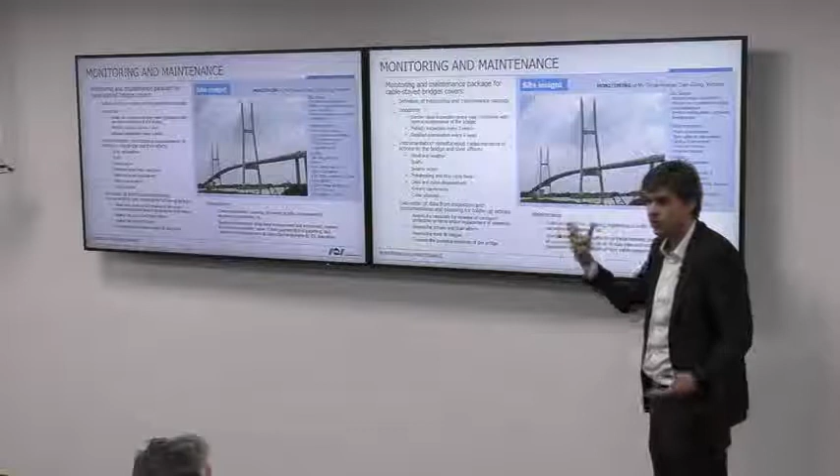In the tower, you can reach the anchorage which is inside the tower. Usually these towers are built with a void inside, with a core inside, you climb up, and from there you access the anchorage. Then, if you want to have an idea of what happens outside of the tower to the cable, we go with climbers, or you check what happened at the bottom there, which is more loaded. If you find out that you have no issue here at this location, you can deduct that maybe there is not much issue on top as well - the risk that you have an issue on top is lower. If now you start to have recurrent issues at this location, maybe you want to invest into a deeper investigation of what happened on the top. So you can adjust your inspection program according to your findings.

Usually this tower is reachable at the top point from the inside? Yes. It depends on the tower design.

Is there any approach to monitor this detail using cameras or whatever? There is - with some of the modern repair and monitoring things, drone technology is now improving to an extent that you can get much better access using drones to fly up and do camera inspection externally. That's developing with time and improvement of current technology, which is a lot easier than the older method, which was sending climbers up.

Because I feel this point is not always reachable - sometimes this tower is solid, not. Yes, correct. If you have a saddle, for example, the tower is solid. So you have some designs where there is already some lifting device attached to the tower - I'm having in mind, for example, Wadi Laban in Saudi, where you have a lift directly attached to the tower for future inspection. And you have projects where nothing has been considered. Then, of course, when you arrive on the spot on a project where nothing has been considered, you have to establish or organize an access on top, which can be difficult or easy depending on the situation.

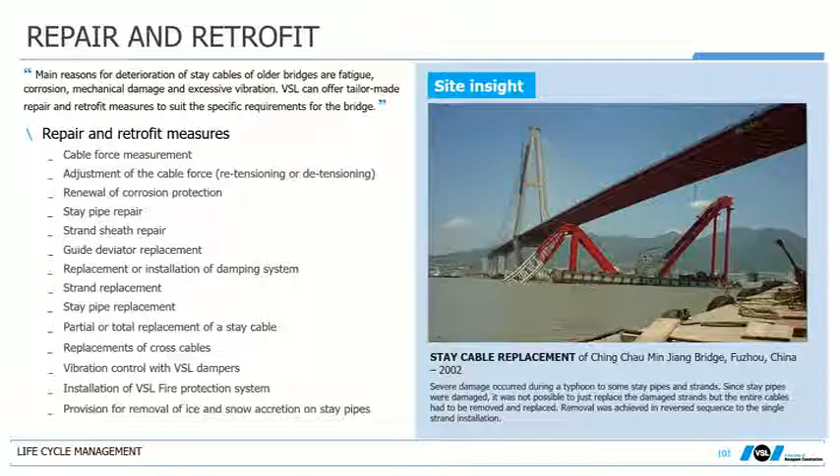Repair and retrofit, very important. This is a type of incident that can occur on the stay cable. Here's an example taken from Ching Chau Min Jiang in China, where a barge, after a storm, detached from the harbor and hit the stay cable bridge - it hit it by the crane through the cables themselves, which was a very nice and interesting exercise of how to test stay cable replacement by occupying the smallest part of the bridge deck. And it was a nice training for VSL.

And here we go as a conclusion about inspection. A few references, maybe. This is the end of my speech. Sorry for having been so long.

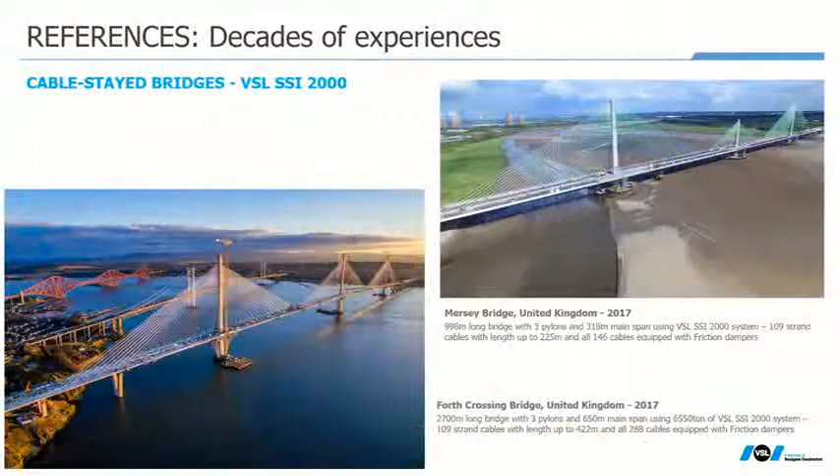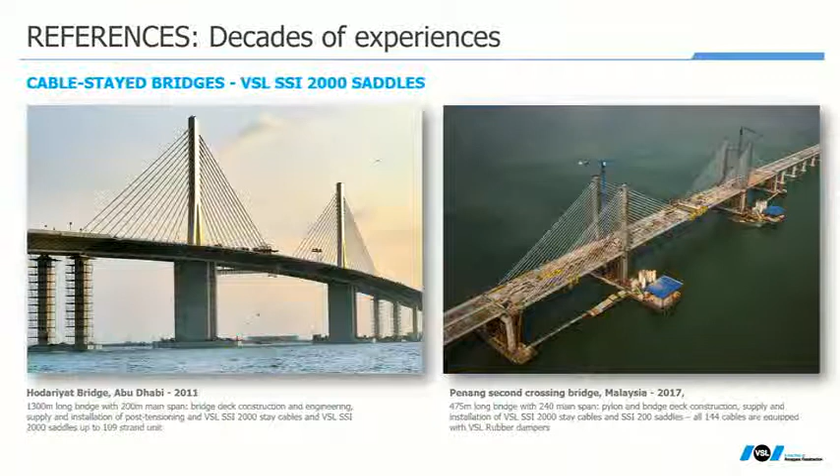About stay cable, what is important is it's one of the most dynamic fields in civil engineering where we still have development, very interesting development where we have PhD university research still running. It's an interesting topic. What has made VSL a leader in that matter is by performing the R&D themselves, and by proposing and offering a range of components, modular, and a wide portfolio of different solutions for various applications. And voila, so this is it.